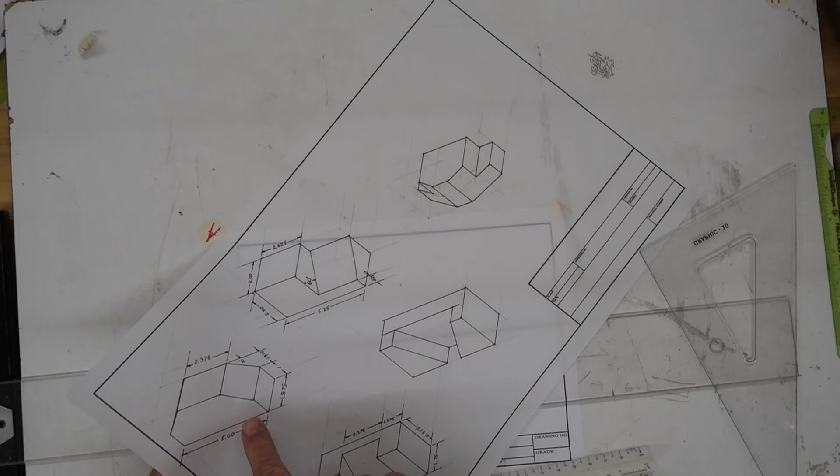In this video, we're going to complete a drawing of an anvil, and the first step is layout. And the first part of that is to square the paper with the T-square, not to the edge of the paper, but to the borders. They may not be the same. And then we're going to lay out the three views.

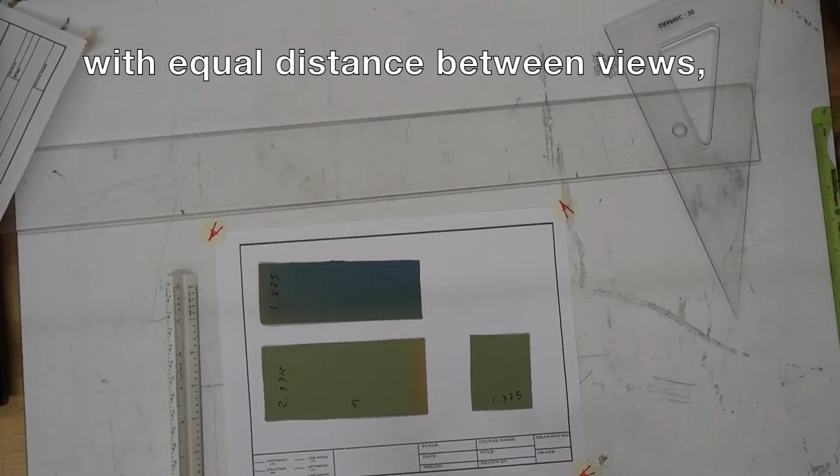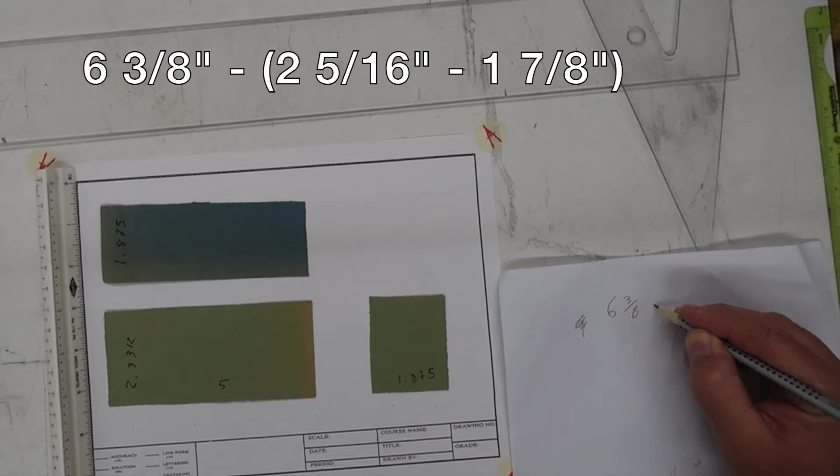They ought to align, and the space between the views should be the same, and the space above and below the views to the border should be the same, and the space to the left and to the right of the views to the border should be the same. So we're going to have to do a bit of math, measuring the amount of room we have on the paper and then subtracting the amount of space that the views will take up. So we'll do a bit of math.

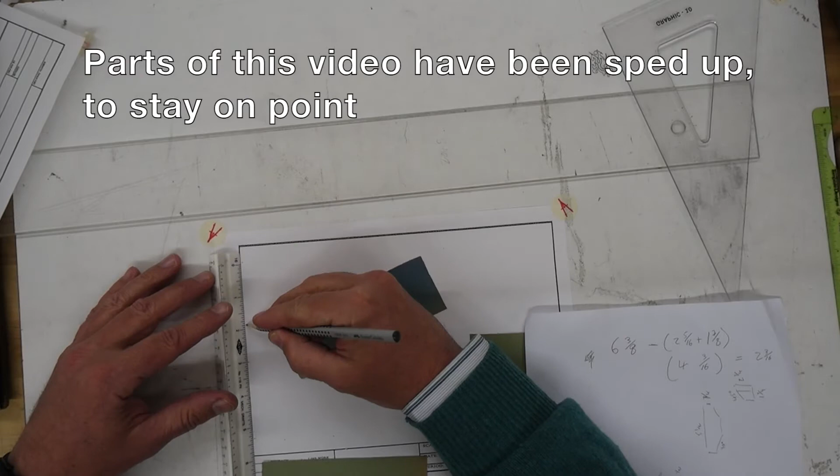Subtracting the height of the front view and the depth of the top view gives us 2 3/16 of an inch to work with. Now we need as much room as practicable between the views for dimensioning, which we'll do later. So I'm going to give myself half an inch above and below the views and proceed to make layout lines. These layout lines are drawn very lightly as construction lines, ideally with a very hard pencil, and they're going to tell us where vertically the views go.

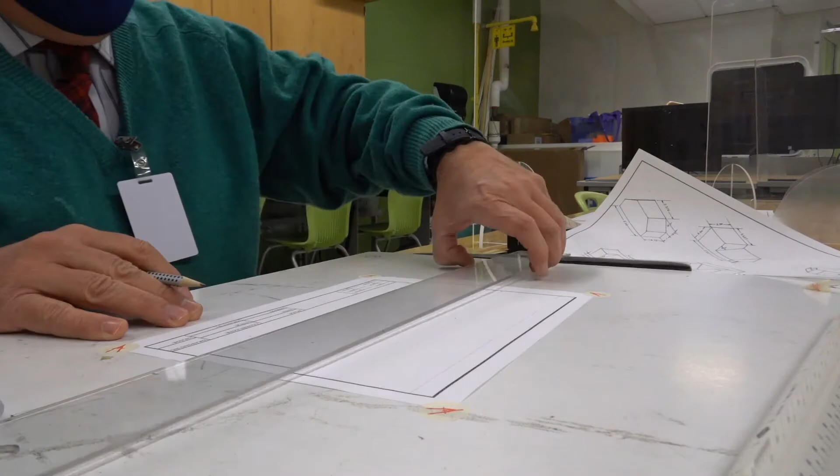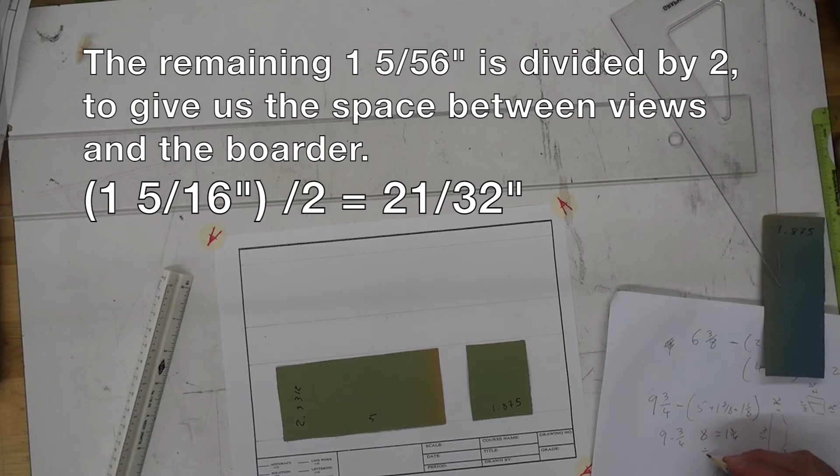Now that distance, in this case of 1 inch and 3/16, needs to be constant. So it's time to do a bunch more math. And we'll measure the width of the paper, write that down, and then we'll subtract the length of the two views and the space between views. And as I did before, I will make some light construction lines, and I'm also going to use the papers to verify that I've got everything just right.

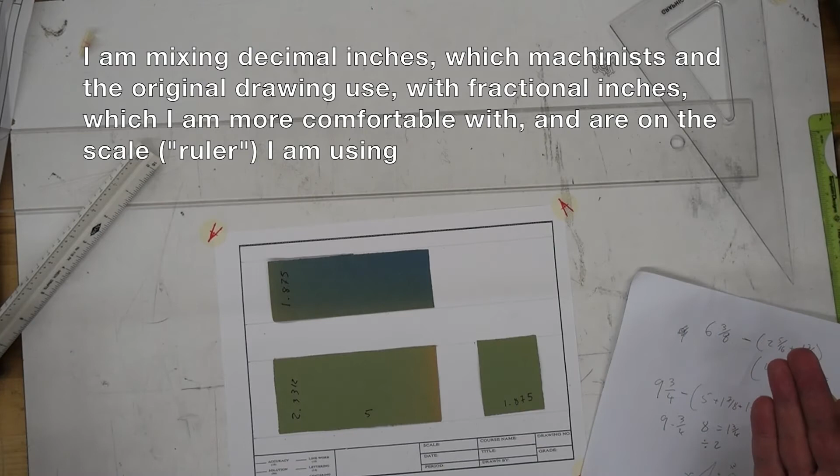I will tell you, sometimes I get the math all wrong. It's a bit frustrating, but hooray, that's the kind of result we're looking for. Equal distance above and below, and to the sides, and in between. Yay, me. Here I am drawing those layout lines. Again, very lightly, so we have to do very little erasing, and we're ready to proceed.

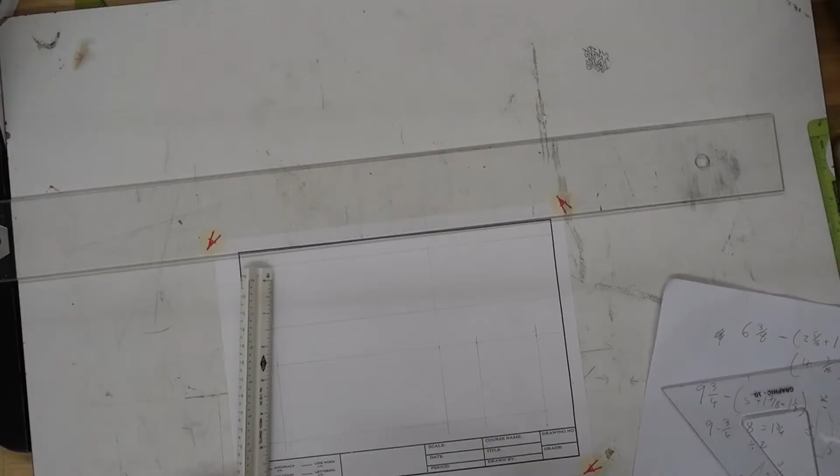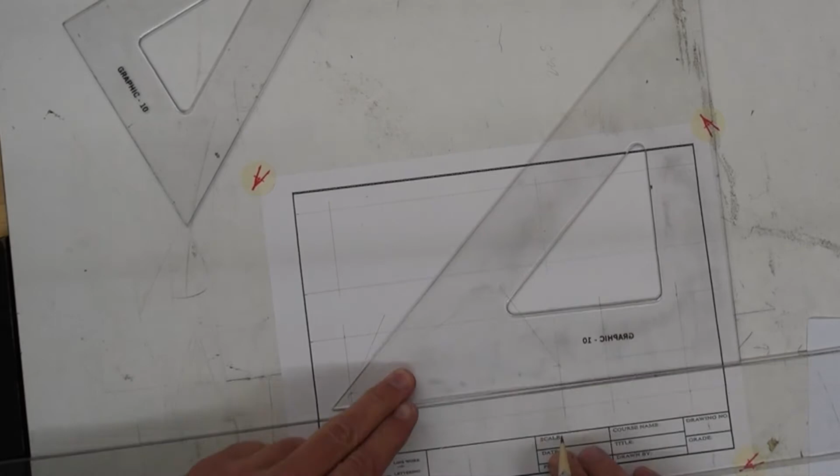Now it is time to draw the object proper, and we're going to start with nice, light construction lines. And I hope you'll see how what happens in one view happens in the other views, just differently. So if I find where the angles start in the front view, I can then project over to the side view. You're going to see one of the reasons why, honestly, we draw these very light construction lines, because I made some mistakes with getting the right angle. It's a 45-degree angle. Get it right.

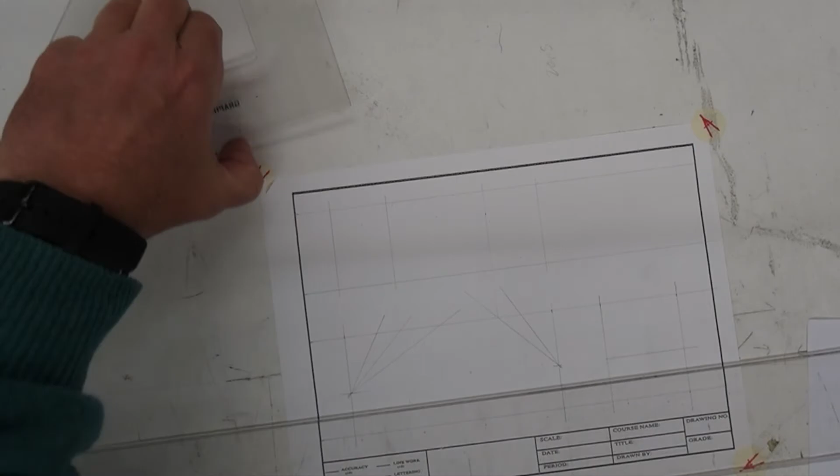All right, so we'll get that, and from that intersection of the angle to the top surface gives us the location of the line in the top view. And again, we'll line it up with the right one. And if we keep our construction lines light enough, we don't really have to do a whole lot of erasing. Okay, ready for the next step.

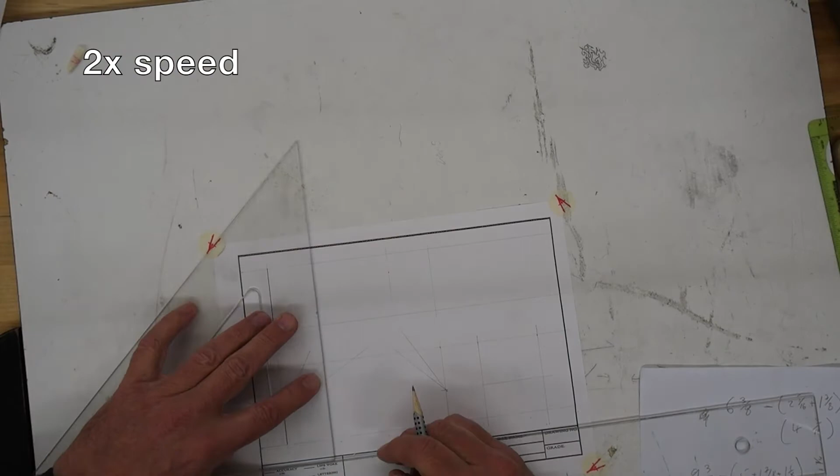The key to drawing really good object lines is to make them bold, dark, and strong. Muy macho! Drafting, such a calm thing, and yet. So we've got the layout lines, and as long as we don't overdrive it, as it were, we should be fine. And I got away with it this time.

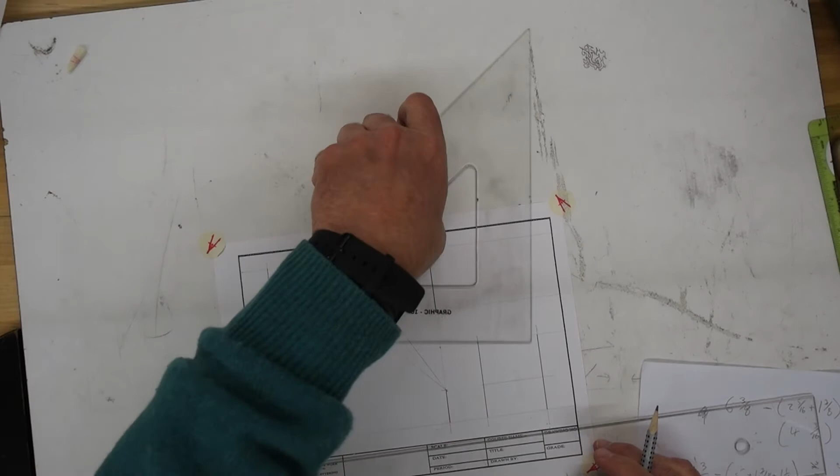I will confess, there have been times, and when you do it in ink, it's a disaster, where I've gone too far too fast, and ooh, now what do I do? So we've got the vertical, and now we're going to do the angled object lines.

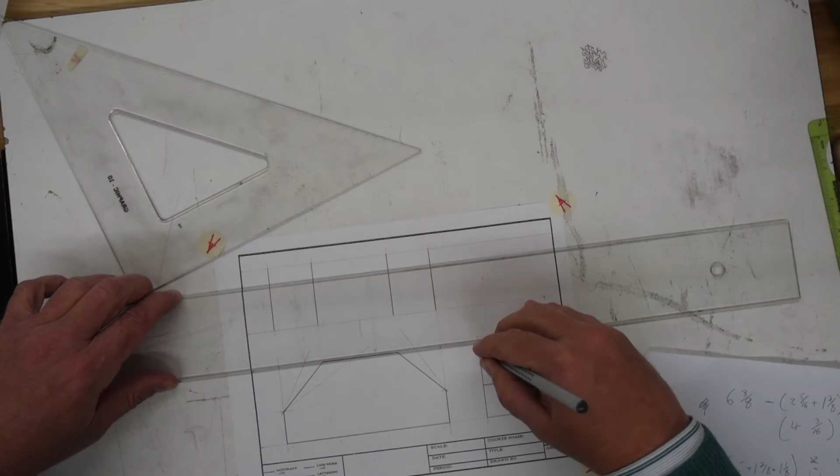Right. Now some concerns are potentially to get smearing from the pencil. So it's a good idea to lift up, and I'm doing it very slightly here, but I am doing it, the T-square and also the triangles to minimize smearing. Something I did in college is I had very fine eraser dust, and I'd spread that over the drawing surface before I worked, so that any graphite, instead of smearing, would get picked up by the erasers. We're going to do a little cleanup, and if I was getting close to those lines, I would definitely be using an eraser shield as I go.

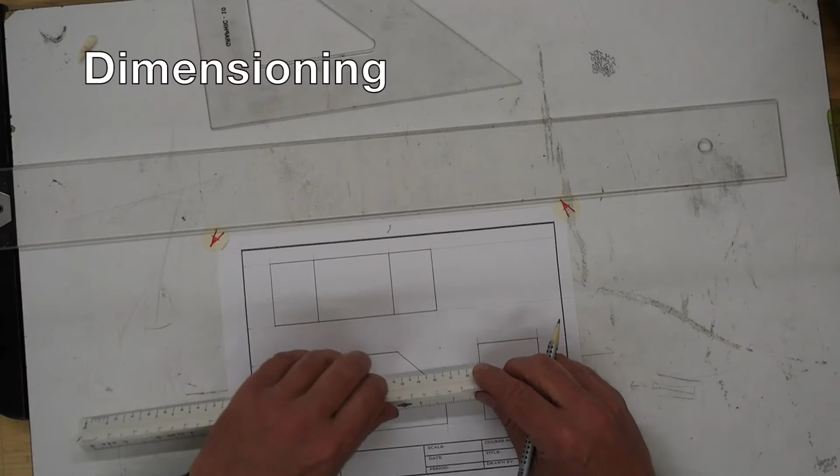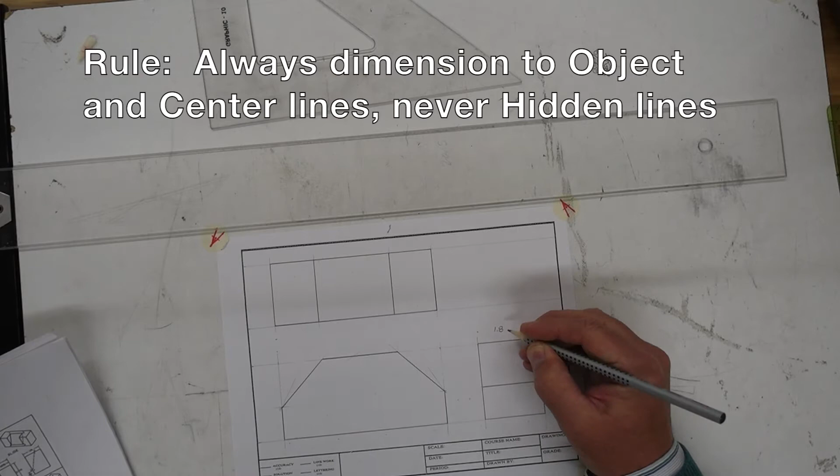Okay, we're ready to dimension, and successful dimensioning involves following a set of rules. One rule is, as much as possible, put the dimensions in between the views. And if you can possibly avoid it, never put a dimension inside of the object. Another rule is we always dimension to object lines and center lines, never to hidden lines. And sometimes you have to do what's called a breakaway view in order to follow this rule.

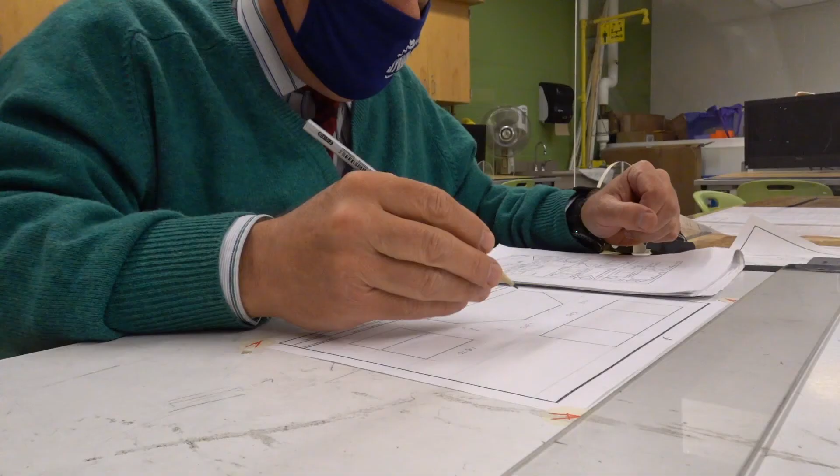Now, we're going to be drawing shortly some dimension lines, and these numbers are the actual dimensions. The dimension line will marry up with them. The first dimension line from an object should be 1/2 inch away, and then every subsequent one should be 3/8. So the first one would be 1/2 an inch, the next one would be 7/8, and then 1.25 inches. I don't have enough space, I gotta fudge it, so these are all gonna be about 3/8 of an inch away from the object and then from each other.

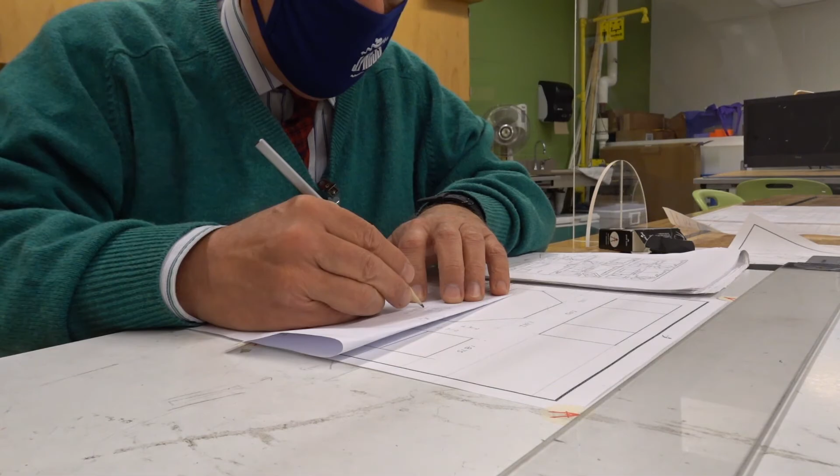Okay. Another rule we need to follow is we have enough dimensions that the person making this doesn't have to add or subtract, but we have no dimensions beyond that. So enough, but no extra. Machinists, tool and die makers are typically very good at math, but they cost a lot of money per hour, so don't be wasting their time and the company's money making them do math. Likewise, carpenters and woodworkers tend to be very good at the mathematics they need to do, but again, don't make them do work on the site that you don't need them to do.

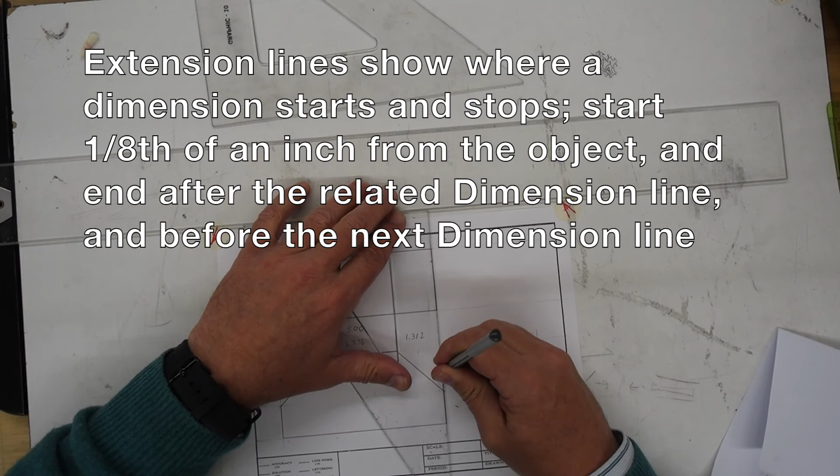Okay, I'm now going to draw an extension line. This doesn't quite touch, about 1/8 of an inch away from the object line. It's not quite as strong as an object line. Now I'm drawing some dimension lines. They're also lighter, thinner. Okay. And you can see they're about 3/8 of an inch apart. We have a couple more extension lines. All right. And now I'm drawing some dimension lines.

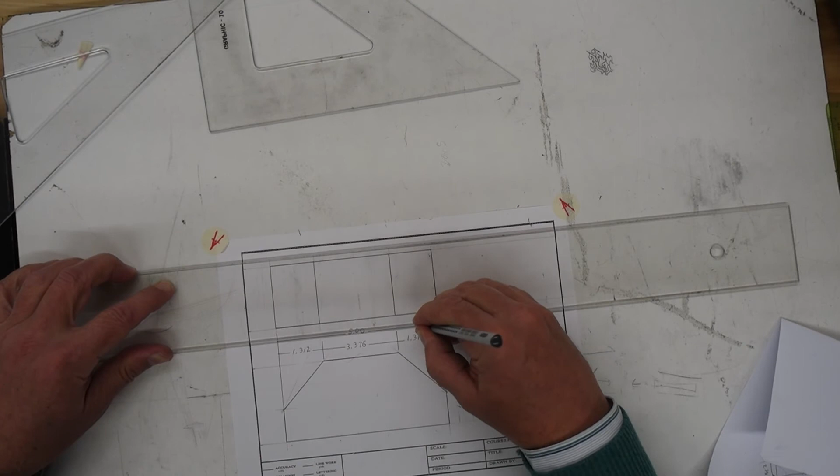And you may have noticed as I wrote the numbers, I always wrote sort of down, pulling the pencil towards myself. When I made an 8, I didn't make 2 loops. I made basically a backwards 3 and then a regular 3, if you follow the line. It gets much tighter, which is really important.

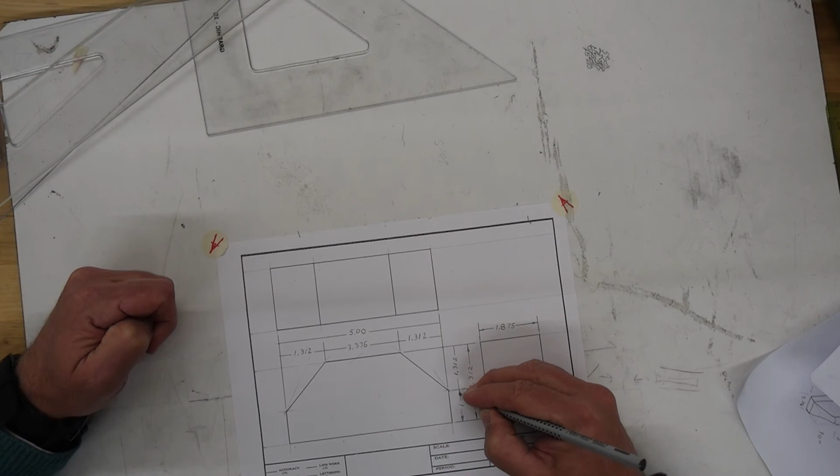See these dimension arrows? They should be sharp and pointy, stabby, stabby, not big spoon-like things or caveman arrows, okay? Very important. If you're doing architecture, you're actually allowed to be a bit creative with these things. But for machinist work and the like, no, no, no. Pointy, pointy. Thank you very much.

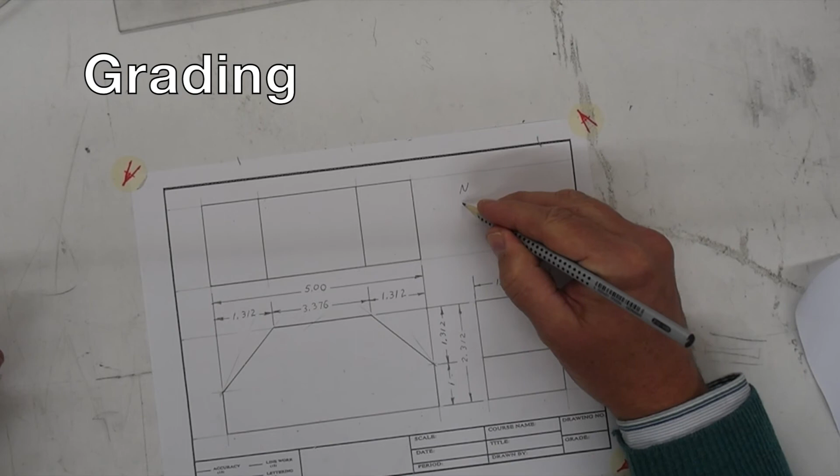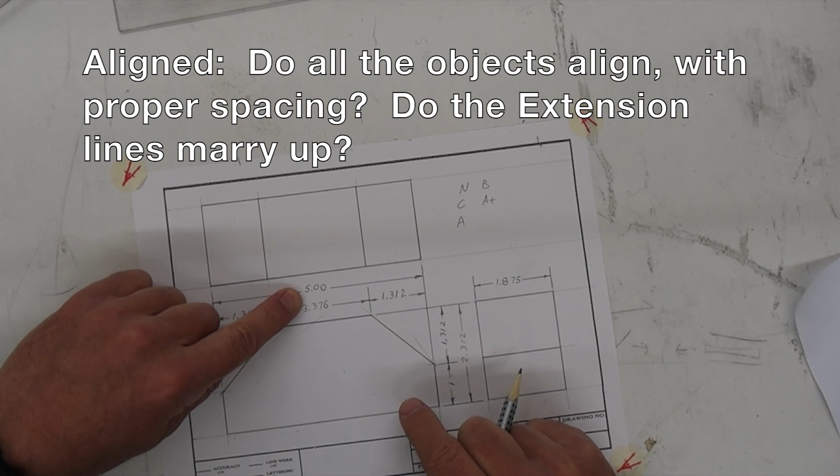Okay, time to grade my work. And the thing to understand about drafting is it's a loser's game. And it doesn't mean that you're a loser to play it. It means there's an ideal drawing and then there are mistakes. So as I look at my neatness, I can say, some of these object lines went a little too far, the corners aren't crisp. How complete is it? Well, I didn't miss anything, so we're good to go there. The alignment's a little weak to my standards. Some of the lines don't line up as perfectly as I would like, so we're going to go with that. And then the average turns out to be, I got to do some math in my head here. Again, when you do dimensioning, don't make people do math. It's a 90%. Okay, better luck next time.